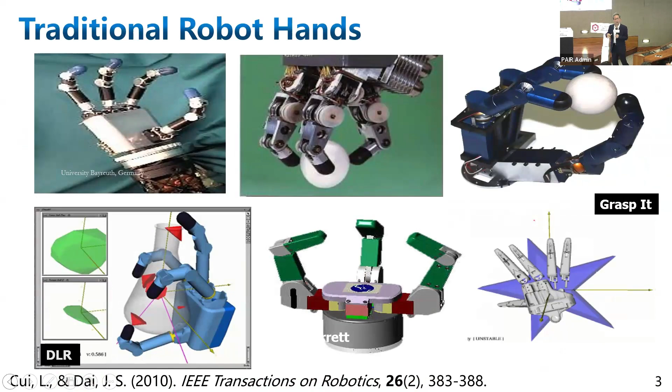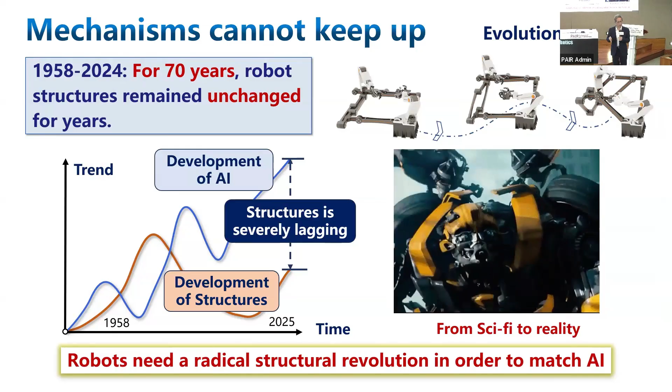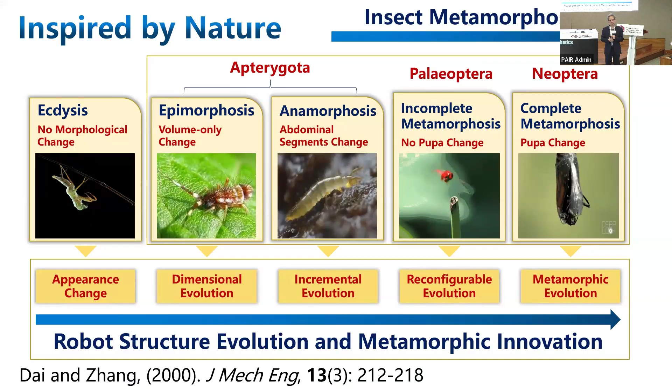So in such case, let's look into nature. Nature is varying - there are articles saying 20 billion types of different species, different insects. So we see in nature, they have dimensional evolution, incremental evolution, reconfigurable, they have metamorphosis, holometabolism or hemimetabolism. So there's complete metamorphosis and incomplete metamorphosis in nature.

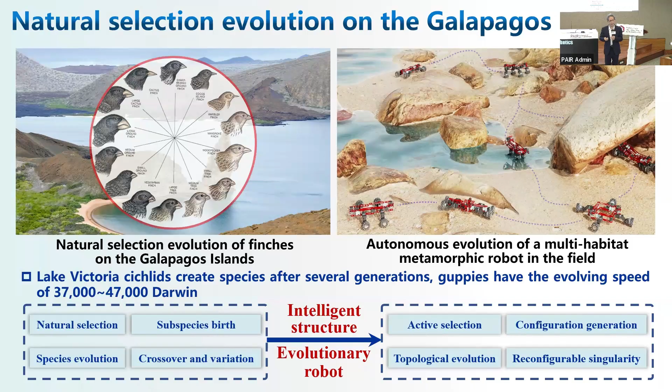If we look into geology terms, all the environment and the core and the rock are changing with the selection. In such case, we see meta means changing, and morphosis is a form. So changing different forms.

Into a new structure. If we look into this pupa, on the left-hand side is hemi-metabolism, that's incomplete metamorphosis. And on the right is holometabolism. So metamorphosis is a changing of cells or organism from one type to a different type.

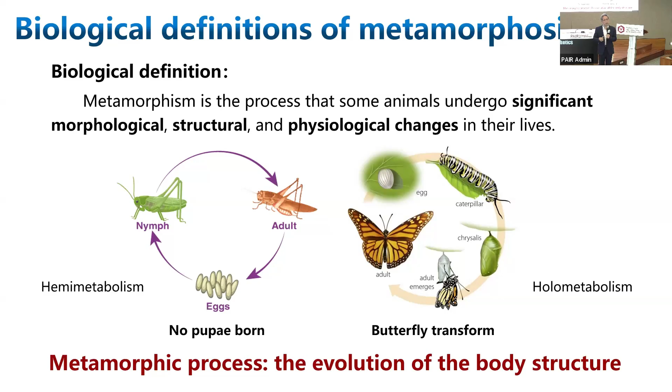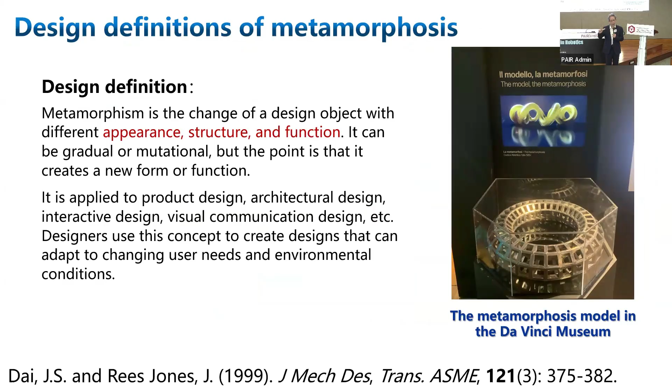That gives you evolution of body structure. And we look into this in another sense - for rocks, they are under temperature or physical change, they are presenting all the changes. If we look into design, there's metamorphosis in design. You look into this Da Vinci Museum - on top, that's the model of the metamorphosis. So that's metamorphosis in nature.

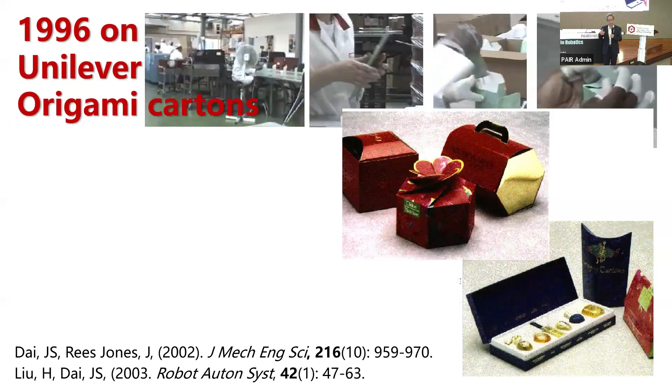Let's look into metamorphosis in arts. So origami art, and you look into those fancy origami that was taken by myself in 1996. All the perfume packs with all sorts of different packs, different shapes, try to attract customers.

However, for those origami, they have a different shape and they can change shape from one type to a different type. We see this from paper, folded into triangular origami. And in that case, that was 1996, I was in Unilever. So whenever I went to my office, my desk had a pack of all the origami cartons.

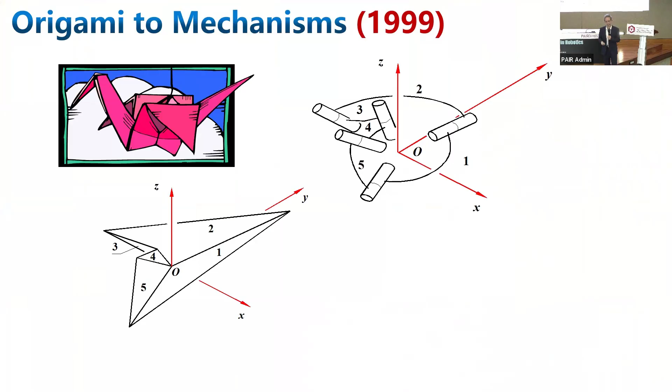So my task then was to try to do dexterous robots to fold origami. My first instance was to try to see if these origami can be transferred into any mathematical model. In such case, if we take one corner of origami and map it into a linkage, the creases can be mapped into joints, the paper can be mapped into a link - that's a 5-bar link. If we add open chains, that gives you another mechanism.

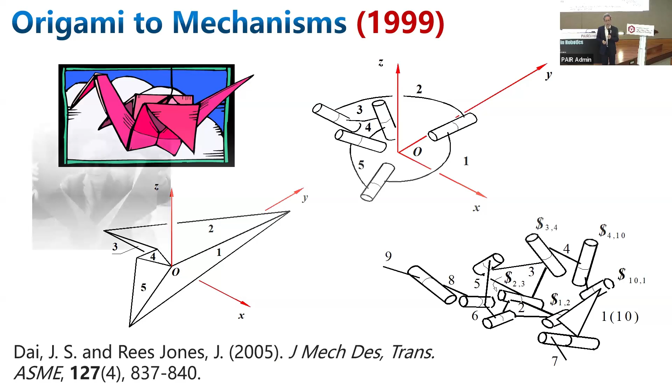So we see the mechanism, the metamorphosis in nature and the metamorphosis in origami - they are changing the shape. We can see the other art, that's the Schatz linkage. The Schatz linkage is only cut from a cube. You cut the top off, you drop the bottom, you leave the middle chain, and that's a 6-bar linkage.

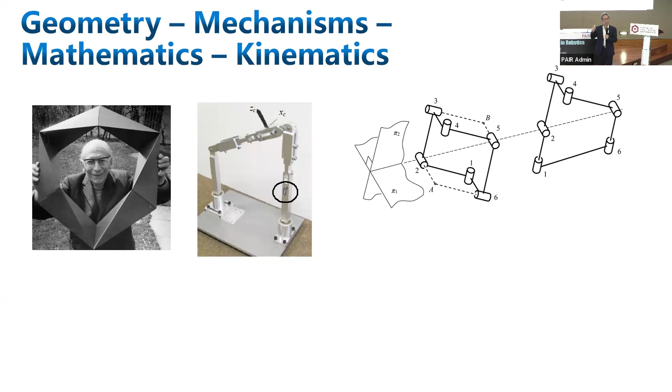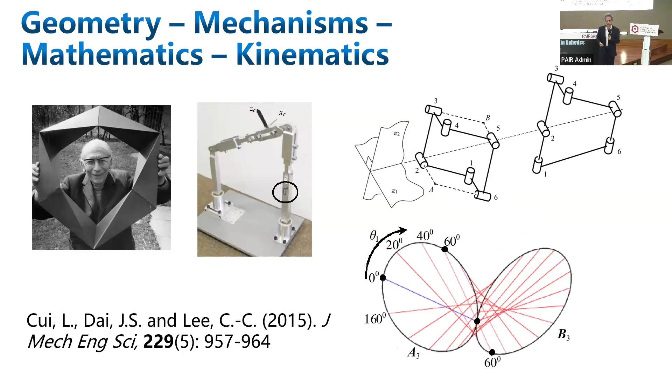So you see the links here from geometry to mathematics to kinematics and mechanisms. In such cases, I think in 2012, we went to Cambridge, we tried to identify this C60 structure. So all the structure could be representing a changing structure of a robot.

So we see currently environmental change, variable environments, and variable tasks. So we need multi-degree freedom, we need multi-function, we need multi-configurations. In such case, we need dexterous, we need flexible, we need sensible to generate a new linkage, a new structure.

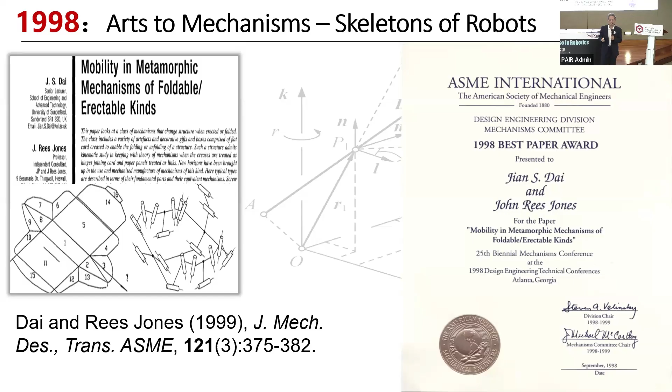So that was in 1998, I proposed metamorphic mechanisms, and now it becomes the metamorphic principle in robot structure. So in such a case, the robot structure can change from one type to a different type. So I received the best paper award at that time - that's a biennial conference.

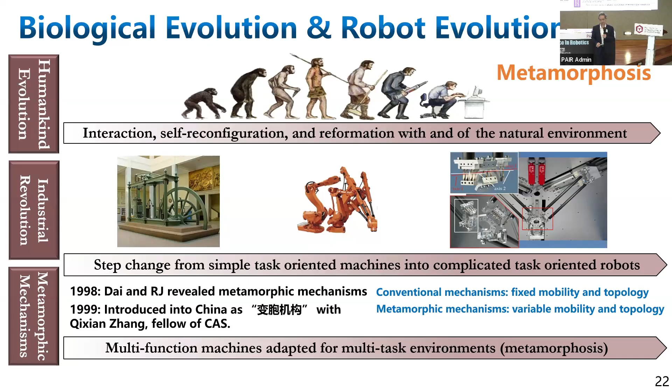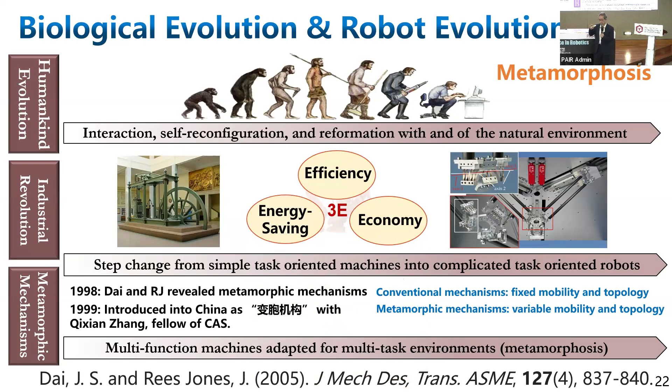And if we look into human transformation in the past millions of years, and if we look into four industrial revolutions since the 18th century, they are changing in a space of time. But can we do this change just in a second from one type to a different type? That's the metamorphosis - that's the metamorphic principle which changes the structure just in a second to adapt to environments. So in such case, this change of robots can meet efficiency, energy saving, and economy - reach 3E. That's biological evolution.

So I think in 1999, I was invited by academician Qixian Zhang to Beijing University of Aeronautics, and then we tried to translate metamorphic mechanism into Chinese. So we see 'met' is multiple and 'morphic' is a form. Metamorphic is a changing form of cells, organisms, and organs. In such a case, we pick up a Chinese word, 变, which means multiple change. 胞 means organism cell, so 变胞, 变胞机构.

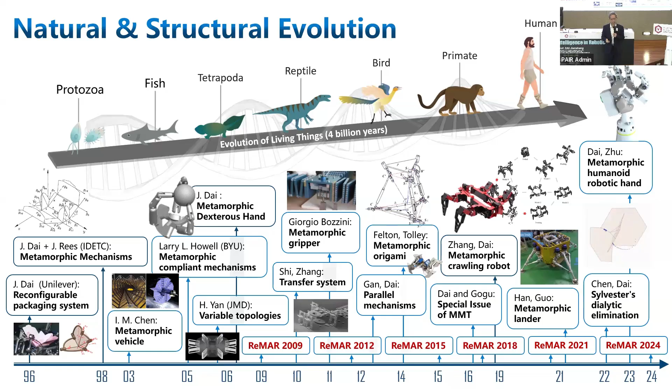So if we look into 150 years of development of mechanisms, we go back to the world's first over-constrained mechanism, proposed by Sarrus, and the Bennett linkage proposed by Cambridge's Geoffrey Bennett. And 1927 is Bricard, that's 6 links, Schatz and Waldron.

So can we generate a mechanism which can cross over all the mechanisms? So that's the metamorphic mechanism which can combine Waldron, Bricard, Sarrus, Bennett, and Bennett spherical.

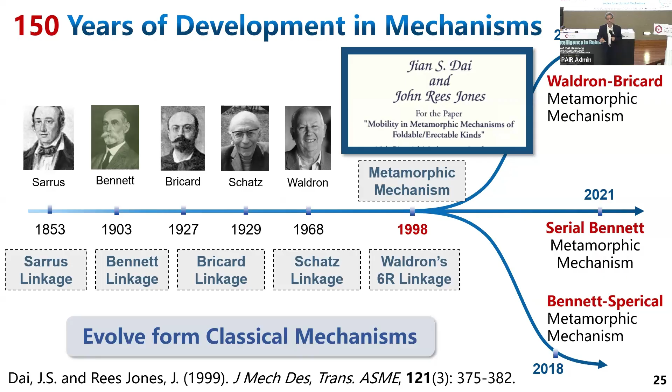So it evolves from different classical mechanisms to generate a changeable topology mechanism.

So if we look into current and different development of metamorphic mechanisms in all the robots in the world, we currently have a metamorphic parallel mechanism, done by other people in different continents. There's metamorphic origami mechanism, metamorphic deployable mechanism, metamorphic tensegrity, and metamorphic compliant mechanism. Also in terms of different robots, different hands, and different metamaterials, they all use this metamorphic structure, which changes the structure, changes the type, to meet different demands in all robotic areas.

So if we look into the history of evolutionary robotics, that was proposed in 1994 by Floreano. Currently, IEEE lists evolutionary robotics as a future cutting-edge research area.

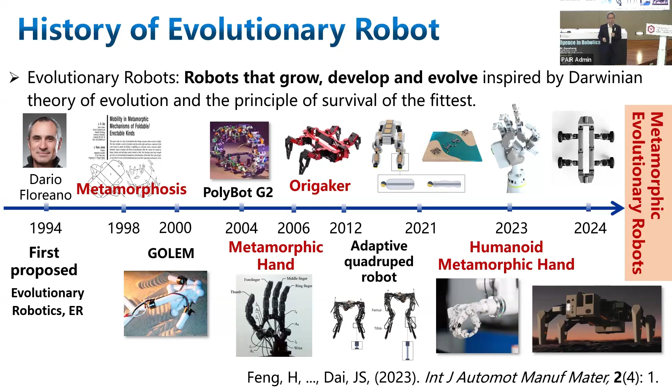So in all of evolutionary robotics in the past 30 years, there are two routes. One route is the main route, focusing on algorithm evolution. And from 1998, I tried to create another route on structure evolution. So we need structure evolution added with algorithm evolution. In such a case, we can reach truly evolutionary robotics in the near future.

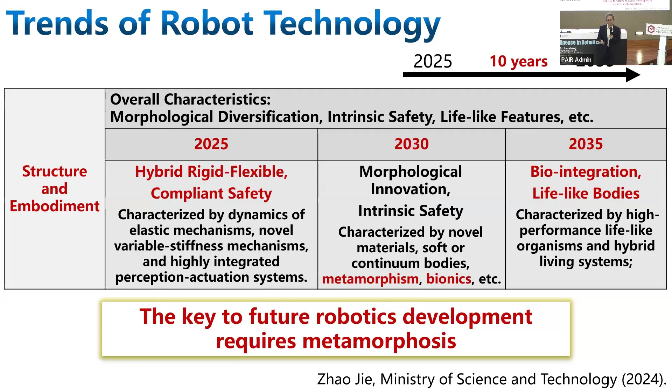So if we look into this slide, I think it was produced by Zhao Jie of MOST, the Ministry of Science and Technology. He suggested that by 2030, all intelligent robotics and intelligent robots have to have the characteristics of metamorphism or bionics, within 5 or 10 years.

So all the metamorphoses we see from nature, from the arts, and from structure -- because of the changing environment and changing, pressing demands, we need change of the structure of a robot. So as such, we have a theory to support metamorphosis.

So we created this biological modeling of robots. In such a case, for the design, it's a similar way to biological selection or biological evolution, theoretically. And in origami from the arts, what's selected is reconfigurability from origami.

In such cases, we talk about this metamorphosis from origami, and we see that's the origami line. If we look into number 3, that's 2006. In the previous 10 years, we were dedicated to origami structures. We presented an origami mechanism in 1998, and then we presented a lot of different origami type mechanisms from different papers.

And in 2010, we look into number 5. That's the US National Science Foundation started origami engineering. Then we look into number 12, so they use this origami tube assembly. And number 16, Jamie Paik uses metamorphic robots.

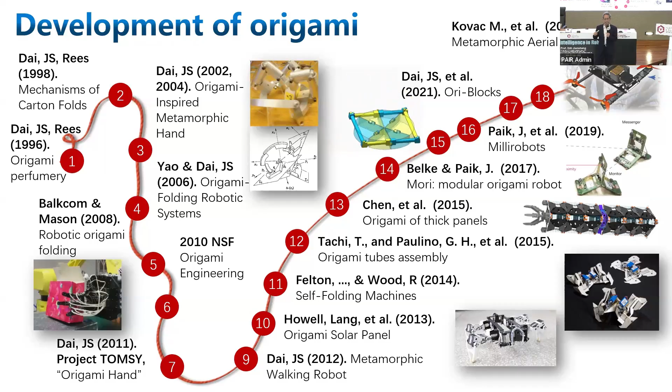And if we look into end of 2023, that's Mirko Kovac, created metamorphic aerial robots. So we can see the principle of evolutionary morphology and metamorphism, from art inspiration to biology to structure change, to create the 3E: efficiency, energy saving, and economy.

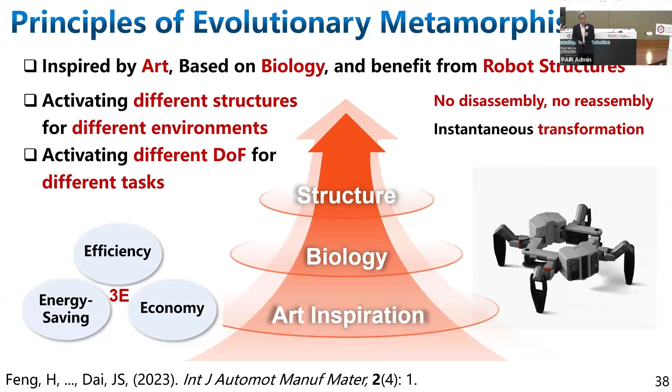So as such, we have a mathematical principle for this metamorphosis. We try to, because all the robots have a joint - say if your wrist is normally represented by 3 joints, and the elbow by 1 joint. So for each joint you have an axis, and each axis is a line in space. So if we study line representation, we can see the geometry, kinematics, and dynamics of a robot.

So a line in space can only be represented by 6 coordinates, which we call Plücker coordinates. The first 3 are normally position, the last 3 are orientation. So in such a case, this fits into Lie algebra.

So in such a case, I looked into all the classical operators and mathematical models. We go back to 1830, the PhD thesis of a French mathematician, Chasles, who said that in all motions, he can use just one motion to represent all different motions. And this one motion is a rotation about a line and translation along lines - so that's the line motion that represents all the motions.

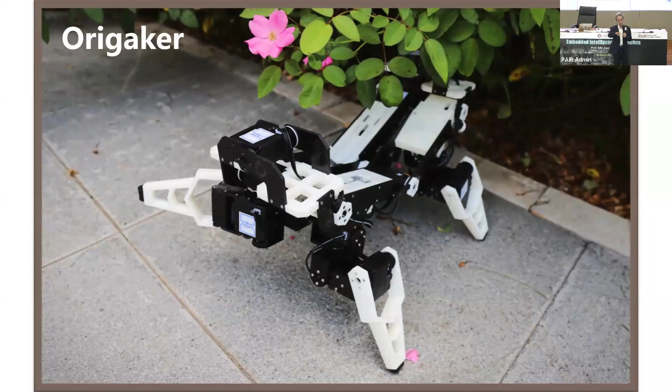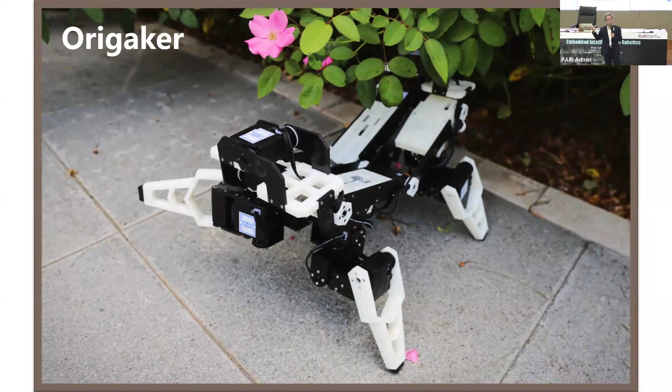So that's what we established, I think in 2018 - the metamorphic robots. We call it origami, from the origami idea - origami walker. So we gave it the name Origaker.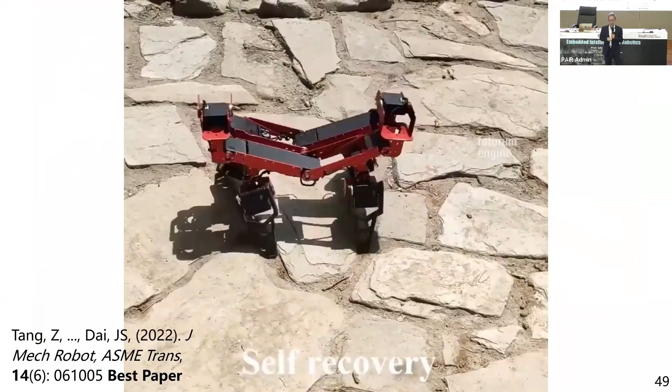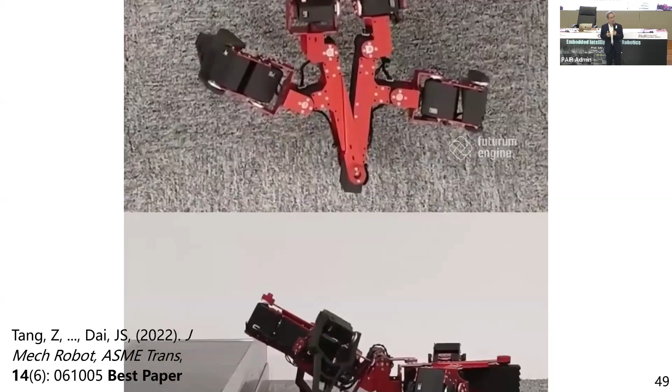1 million viewings, and we received the award for 2022 as the ASME Transaction Best Paper.

So we can see this is the second generation of robots. The robot has many sensors: laser, radar, infrared, and also 3D perception.

If we go back, I think starting this year, China University of Mining and Technology is going to put this robot into the well, for any disaster happening in the well, for this rescue work.

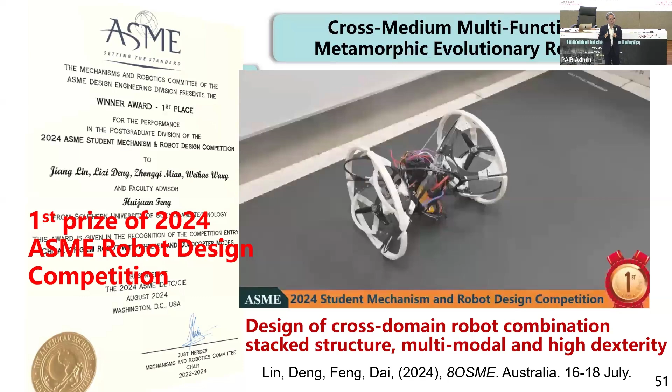And we created this air and land robot that received the first award last year in Washington, D.C. for robotic design.

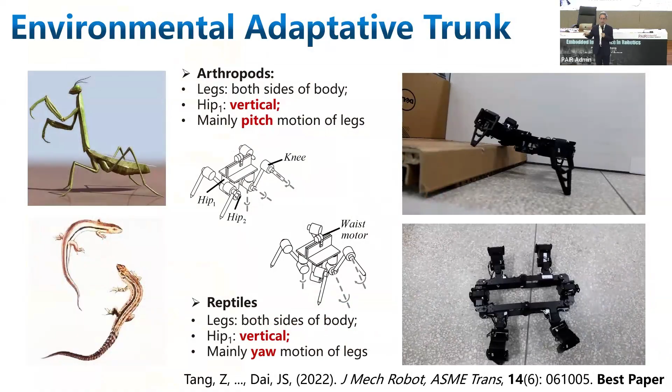So we see all these robots trying to achieve environmental adaptability, trying to match this changeable metamorphic organism.

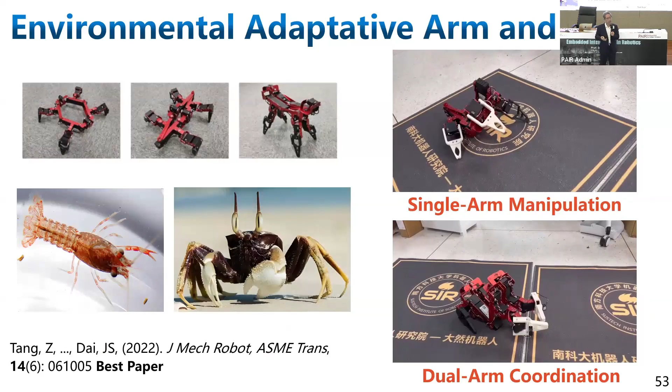And we have environmental adaptive arm and limbs. Particularly, the walker's leg becomes an arm and limbs.

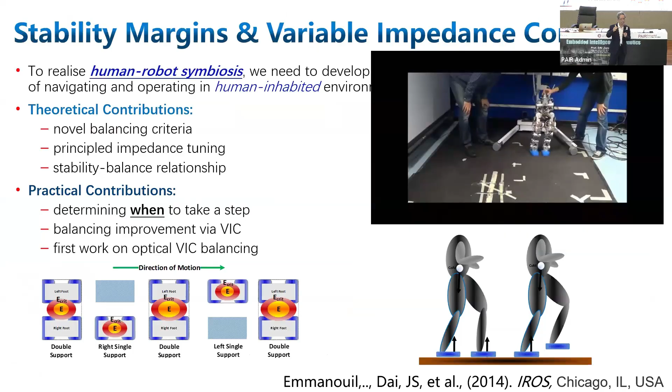We also apply this algorithm into humanoid control. That was produced in 2012. My postdoc at the Italian Institute of Technology tried particularly the impedance control, in such a case for balanced walking. That's early, I think, 13 years ago.

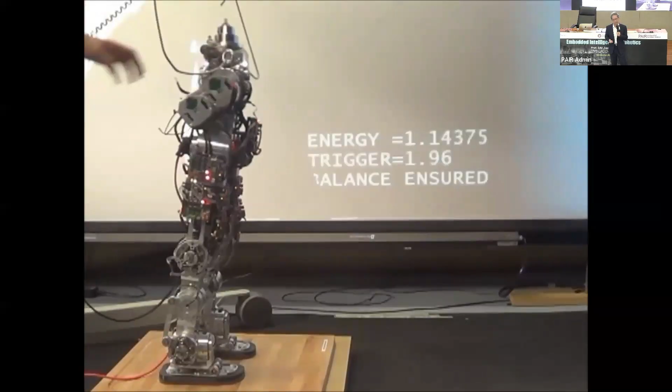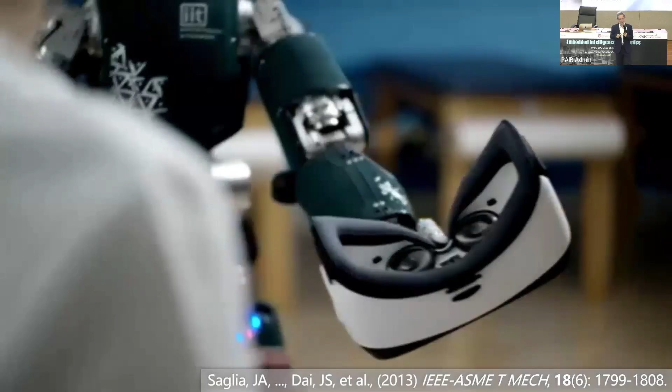But now we develop more. If we look into 2012, the humanoid was produced by Darwin Caldwell at the Italian Institute of Technology. My student joined to do this control algorithm. So that's really humanoid work in Europe.

And we see structure intelligent humanoid - that's the humanoid generation in the lab at SUSTech, which I lead.

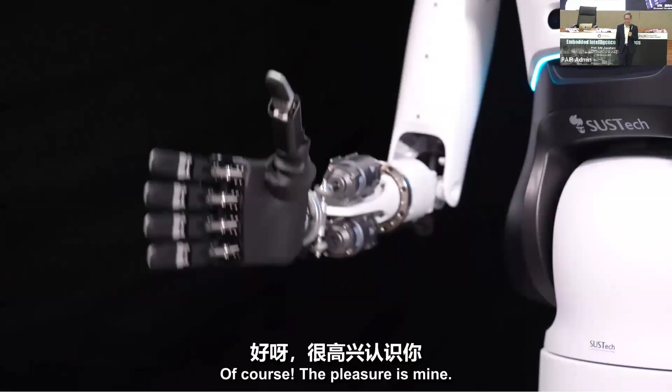你手上拿着一个橙子。 Now the interaction is very quick for the second generation.

好的，摆个点赞的姿势，来和我自拍一张吧。 Particularly when you ask questions, they speak while they are thinking - speaking plus thinking, to make the speed quick.

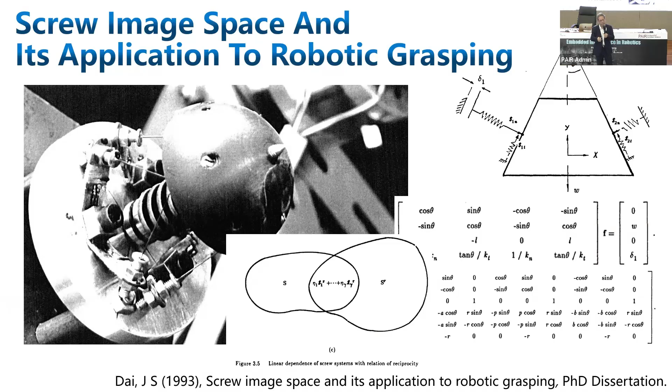I was surprised by this slide. That was a slide I borrowed from January when a Harvard professor came to King's. He showed this slide, and it was actually my work from my paper published in 1996. He said that's the earliest elasticity integrated into a Jacobian matrix. You can see the elastic compatibility matrix, task wrench, and stiffness.

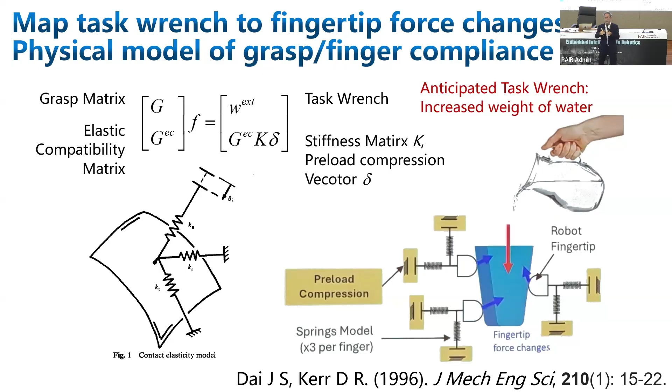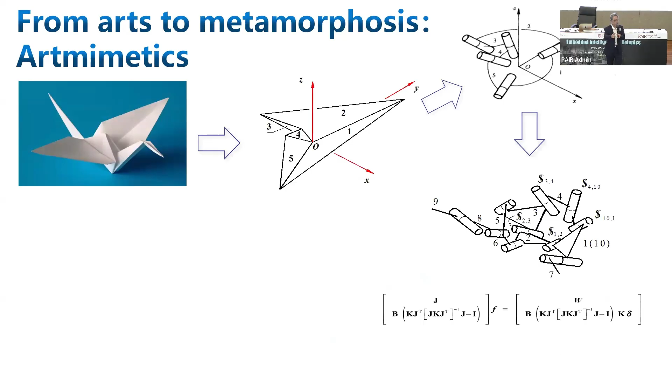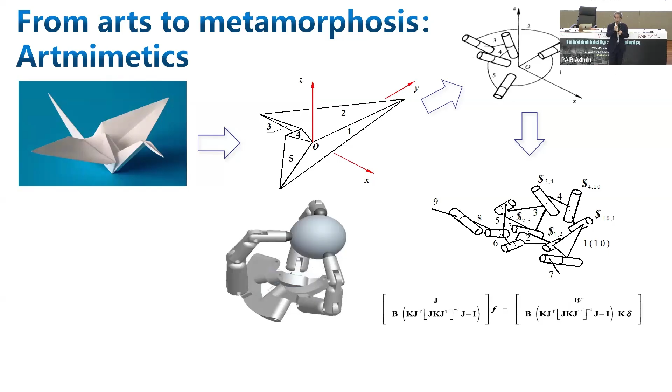In such a case, you see the right-hand side bottom — when you add a load, the old pretension adds into this matrix. So we go back to this origami concept and then I added this open chain. What the open chain gives you is all the changes you can see in the matrix transformation — that's a metamorphic hand with a changeable, reconfigurable palm.

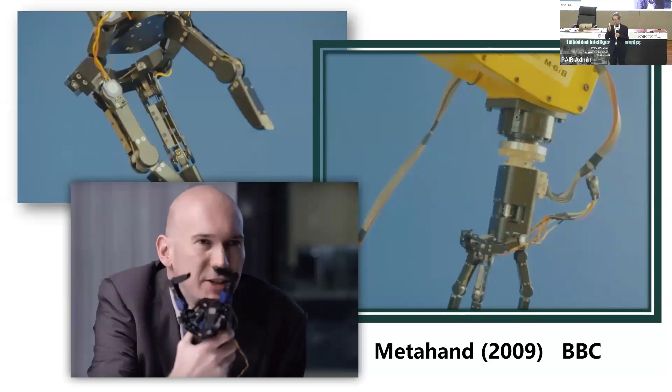That was shown on BBC, and they used this palm-changeable metamorphic chain palm to show people. That was produced in 2009, and now we've generated the 7th generation.

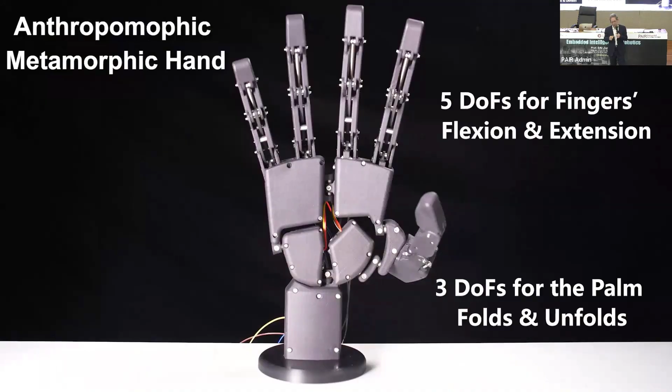I can't remember how many generations. The latest generation has more flexibility and is used for humanoid robots. I think after this generation, we generated another one with a smaller size. And my student set up a company in Shenzhen, DH Robotics.

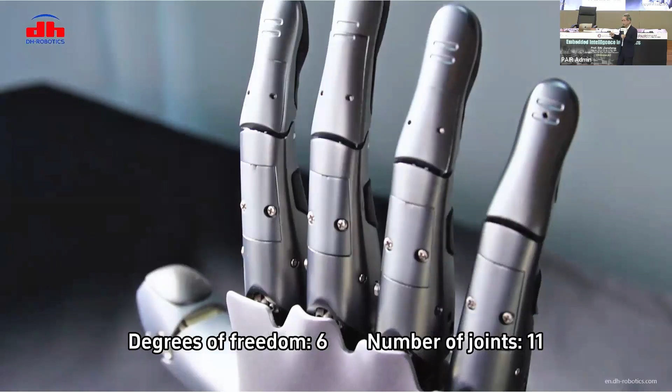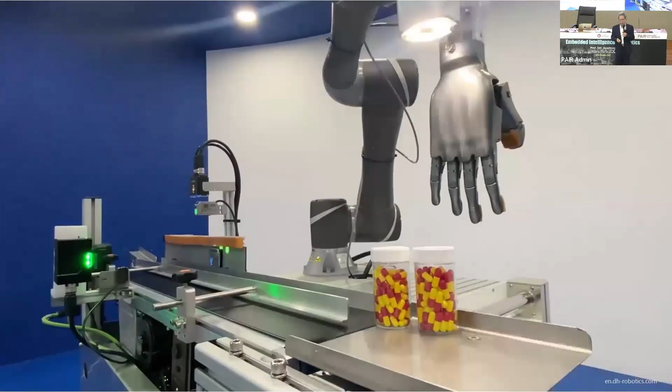So from 2016, the first company was doing end effectors for all these operations. I think I don't have much more on that, so I used this in a European project.

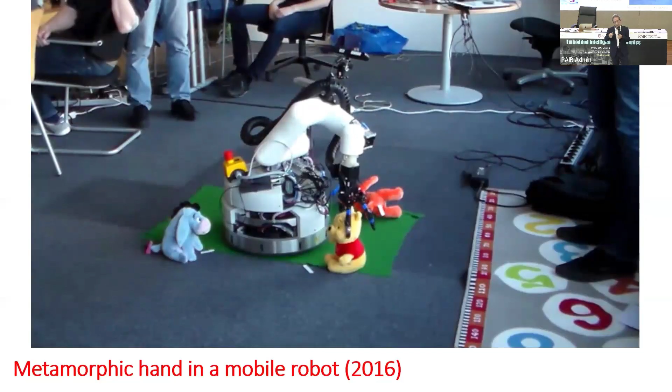The metamorphic hand interacted with kindergarten children. We see this as embodied intelligence — AI, artificial intelligence, plus structural intelligence. It's like Chinese Qigong: one part is reconfigurable, that's the hardware; the other is control intelligence, the software. Hardware plus software, that's real embodied intelligence — artificial intelligence and structural intelligence.

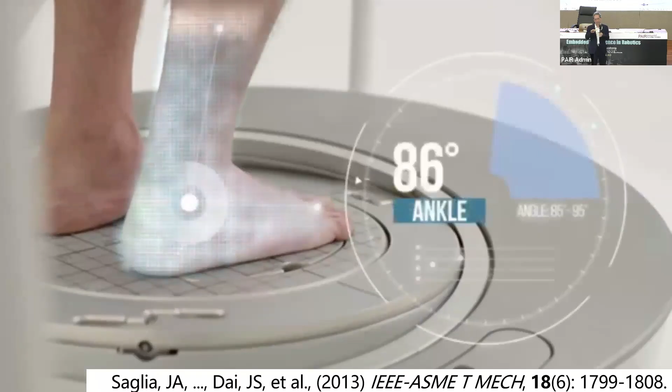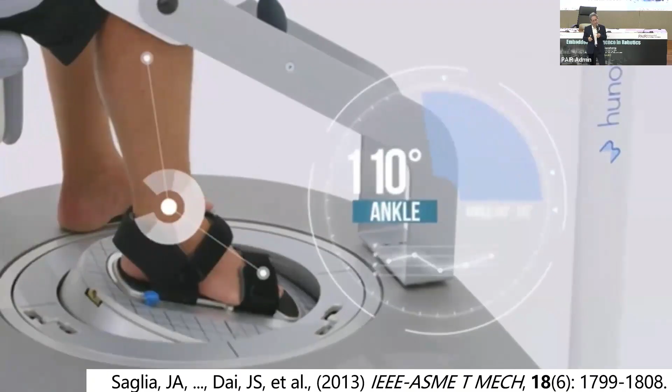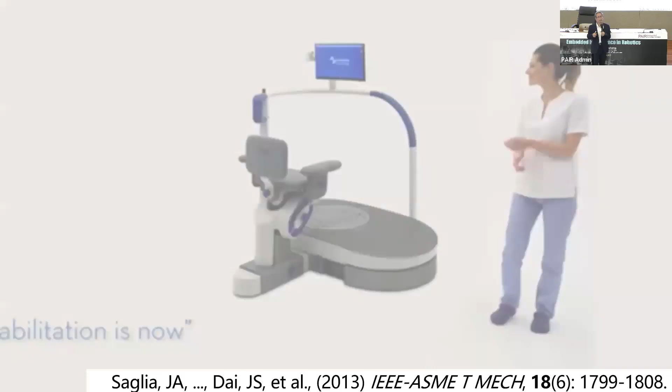Let's quickly go through some videos on healthcare. My students set up a company in Singapore, and this one is in Italy. In this case, for ankle rehabilitation patients, it extended to lower limb rehabilitation. While doing the limb rehabilitation application, the patient can play on-screen games.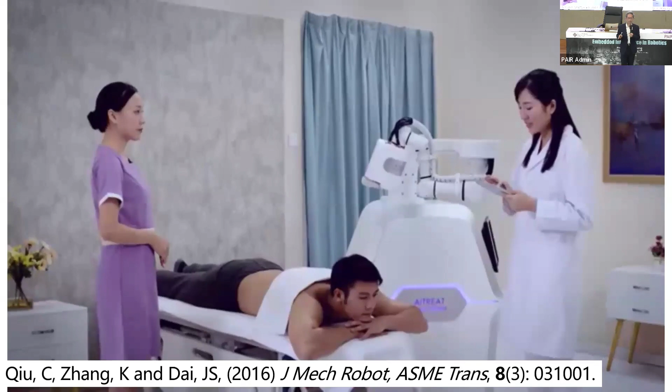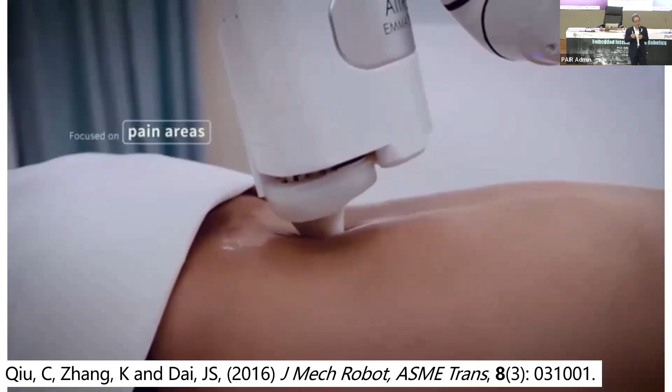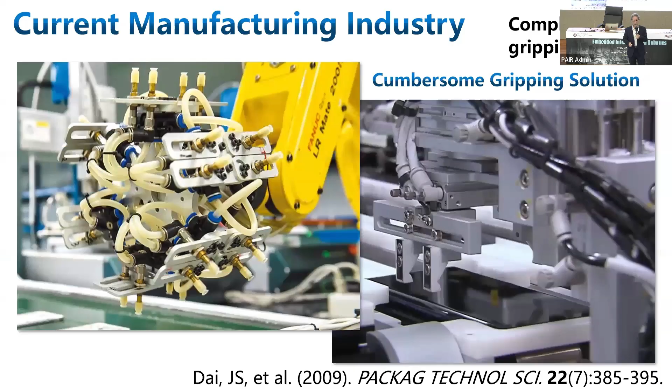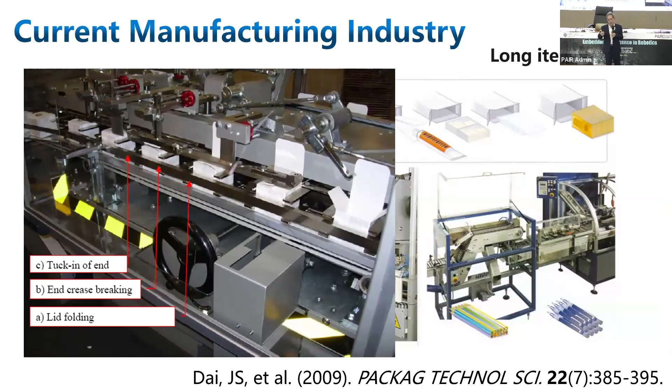Also this principle of metamorphosis and reconfiguration with automatic changing lines applies to current industry. In industry, to only change the product type, they have to reconfigure so many points, but with metamorphosis — this algorithm or new structure change — it will quickly adapt to the new product.

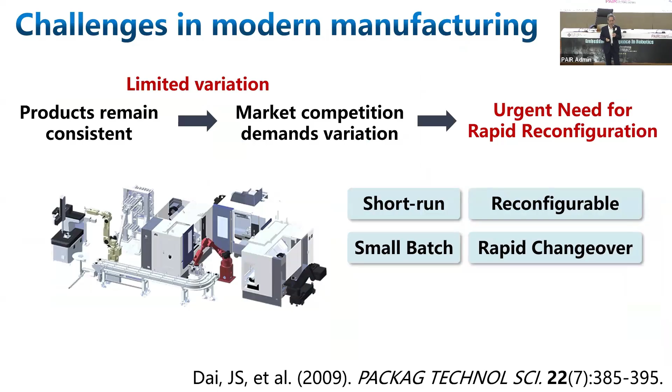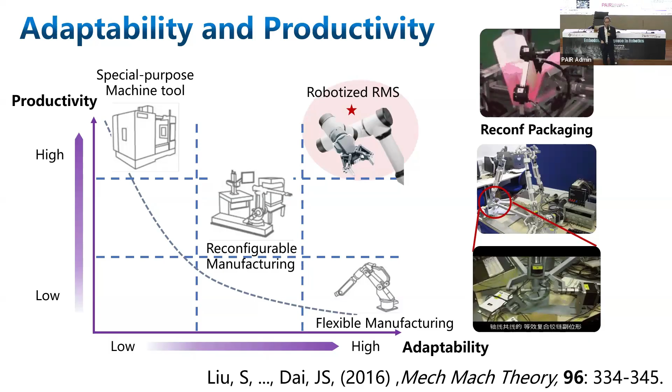As such, several lines — Steven set up DH Robotics, so the reconfiguration applies to the grippers, to different production lines. And now we are collaborating with Foxconn, applying this to optical and nano production.

I'll just quickly go through this — a historical review of metamorphism: in Europe, serving robots; origami development in America; and theory development in China on metamorphism.

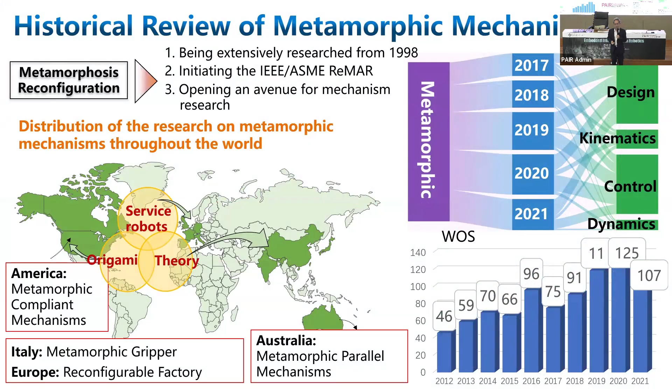2018 in Delft, Netherlands — we set a Guinness record for the first conference dinner held in a church. Then 2021 was the pandemic, so Toronto's conference was held online. Last year was 2024 in Chicago, and next edition, 2027, we'll go back to London.

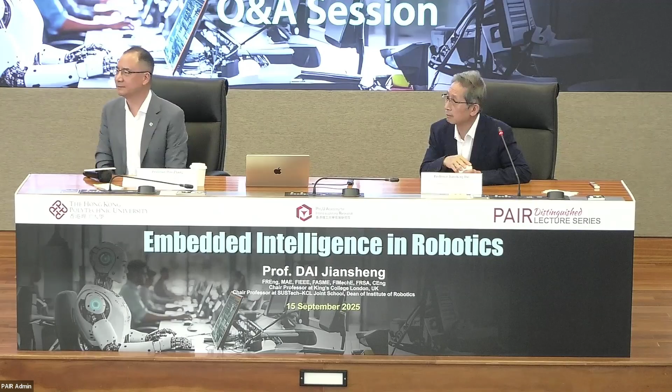Thank you, Professor Dai. How many years do you expect before miniaturization of metamorphic robots can happen, to put that into microsurgery, say vascular operations?

How many years before it's realized in surgical applications? Starting now, I have a collaboration with people from Beijing University, and we are trying to apply metamorphic structures to nano robots. Currently, nano robots don't change their body structure, so we need the body structure to change. When the body structure changes, they can adapt to different degrees of freedom, different topology, and different requirements. So I expect it will be 5 or 7 years. Thank you.

Thanks for your presentation. Sorry, I'm an assistant professor outside the robotic domain—I'm from construction and buildings. So my question may not be very expert, but I'm curious: why is robotics now, as we see on social media, trending toward human-like robotics? I'm curious because I can't see many application scenarios for that. Some function features like walking or grabbing something—existing robot dogs or arms can already do that. Why do we spend so much money and attention on human-like robotics? Thank you.